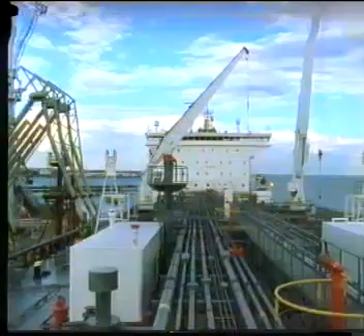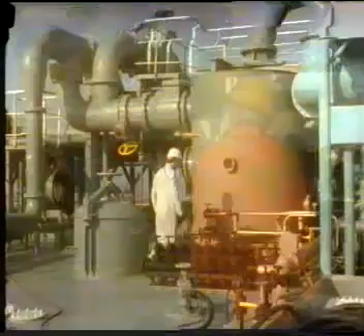All hydrocarbons, whether crude oil or products, are flammable. The reason for the existence of an inert gas system is to prevent fire and explosions. In other words, safety for all those sailing and working on the ship.

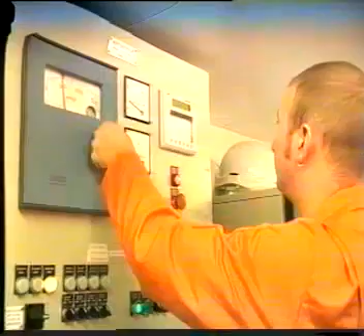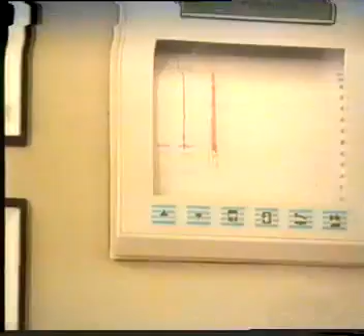To be certain that this safety is sustained, proper procedures are essential all the time. This training package is intended to amplify and emphasize your own training and the material in your ship's inert gas or IG manual. Complete knowledge of this is vital to all deck officers on tankers.

The importance of the IG system is reflected in the way its operation is established in international conventions.

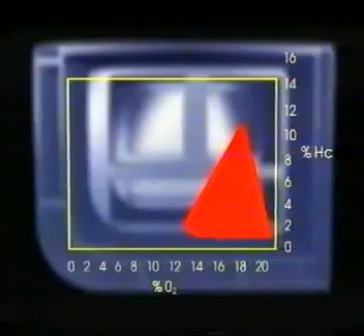The idea behind inerting the tanks is to make fire or explosion impossible because the oxygen level in the tank atmosphere is too low. If we compare the percentage of oxygen in the air with the percentage of hydrocarbon gas, fire is only possible under limited conditions. Outside these, there is either too little oxygen or too much or too little hydrocarbon gas for ignition.

So the percentage of oxygen is crucial to give a good safety margin. The maximum permissible percentage of O2 in inert gas is set in SOLAS at 8% or less for older ships and 5% for new ships. Some terminals require levels of 5%.

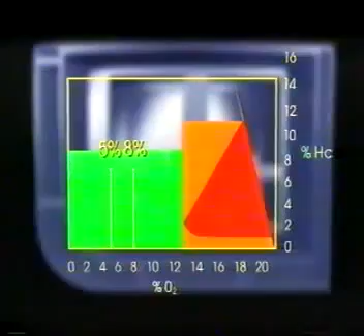The inert gas pressure must always be positive to ensure that air does not penetrate the tanks and increase the oxygen level.

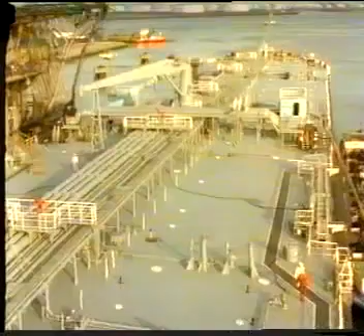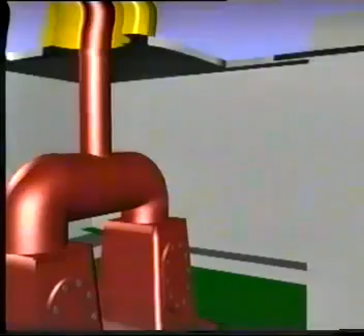The generation of inert gas starts with either the exhaust flue gas or gas from an inert gas generator. This gas has been used for combustion and its oxygen content has been reduced to 5% or below. The gas goes via the uptake valve to the scrubber with its seawater cooling inlet and outlet.

Inside the scrubber, the hot gas is sprayed with water. It is cooled and most of the soot and sulfur dioxide are removed. The gas passes through a demister to remove as much of the water as possible.

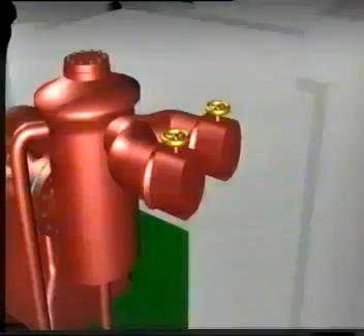There are blower inlet valves before the main IG supply fans. To ensure correct pressure, there is an automatic pressure regulating control valve. Finally, there is either a funnel vent to atmosphere or a recirculation valve and line. These are used to vent or recirculate gas after starting until oxygen content and gas flow is steady.

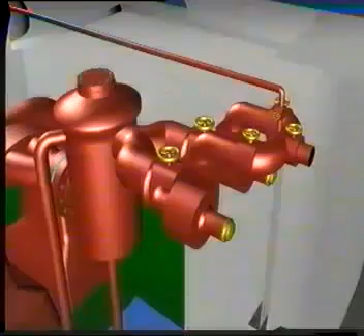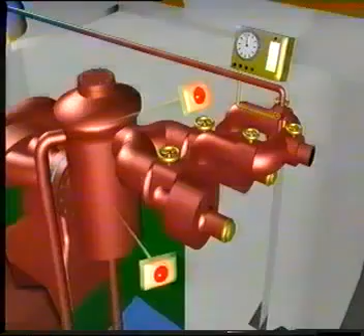Most important are the fixed oxygen analyzer and pressure recorders. A number of alarms will be fitted: to the scrubber to show low water pressure and high water level, to the supply fans to show if they malfunction, after the fans to show if inert gas temperature is too high, and to the oxygen analyzer and recorder to show if the oxygen content rises above the required maximum.

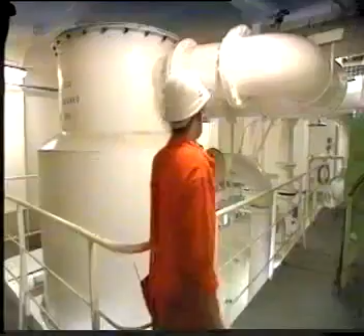Finally, to show if there is power failure to the oxygen analyzer and gas pressure regulator. A well-run system will provide inert gas with oxygen below 5% that is cool and is free of solids and the worst corrosive gases.

Once the gas has been generated and cleaned, it needs a delivery system. And that's what we're going to look at next.

After the pressure control valve comes the deck water seal. This prevents gas from the tanks, which will usually contain hydrocarbon vapors, from entering the engine room spaces. Then there is a mechanical non-return valve and a deck isolating valve before the gas enters the deck main.

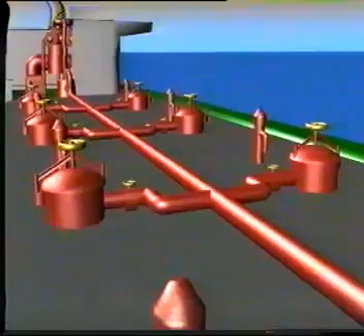There is pipework to deliver the gas to the tanks. On the deck main, there is a pressure vacuum breaker to ensure that excess pressure or vacuum will not damage the tanks. Finally, there are one or two mast risers for venting to the atmosphere.

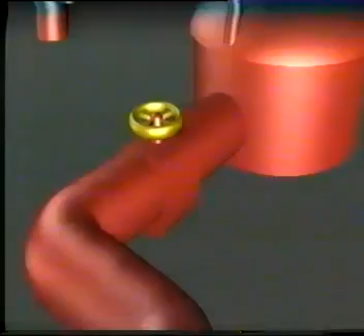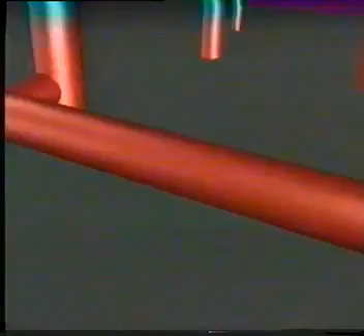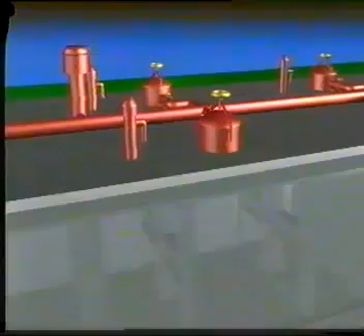Generally, each tank will be fitted with a tank isolating valve. Each isolation valve must be fitted with a locking arrangement. Each tank will have either a full flow individual pressure vacuum relief valve or a breather valve, or an electronic pressure sensor. This is to fulfill SOLAS requirements for full flow vapor relief or pressure sensors to provide secondary protection against over or under pressurization.

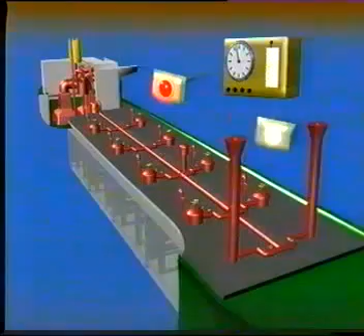Immediately after the non-return valve is a pressure sensor and recorder with a high pressure alarm. A further alarm is fitted which activates if the power supply to the pressure sensor fails. Wet type deck seals will be fitted with a low water alarm.

That then is the entire system. Now we shall examine how it should be started up before examining its use during different cargo operations.

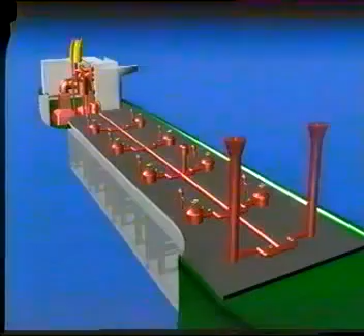They may have to create sufficient load on the boiler to ensure that the boiler will deliver flue gas that will have a low enough oxygen level. If there is an inert gas generator, this will have to be started.

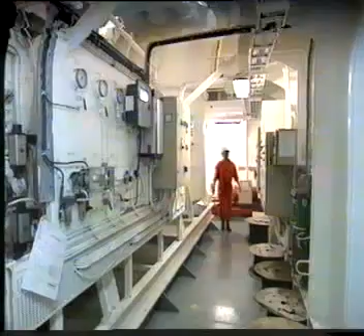Good communication between the deck and engine departments is needed to ensure that soot is not generated during IG operations. The deck department must not rapidly change the boiler load, and the engine department should not soot blow. Both departments need to go through their checklists before the system can be used. The oxygen analyzer must be checked and calibrated.

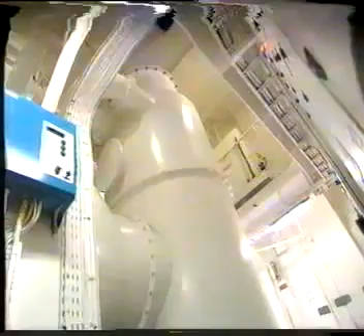The recirculation and vent valves need to be checked to ensure that they are fully functional. The scrubber needs particular attention. Water must be started early to the scrubber to ensure that the internal surfaces are wet. The water flow should be checked before the flue gas can be connected to the system.

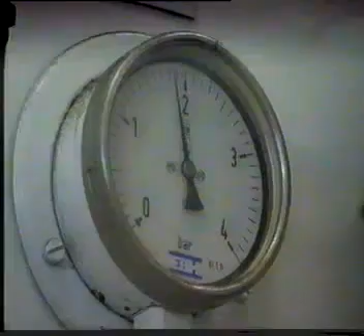When the gas enters the system, it will at first be operated with either the recirculation line or funnel dump line open. While this is happening, a tour of inspection should be made, checking the scrubber for hotspots and ensuring again that inlet and outlet water are flowing correctly and the alarms are operational.

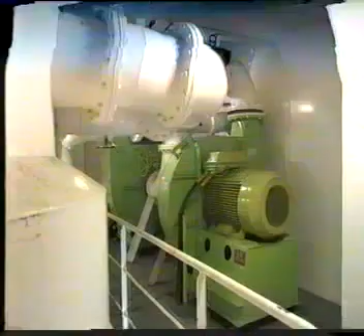The IG fans need sufficient lubrication. They must be checked to see that they are running coolly and smoothly without excess noise or vibration, and that there is no water in the casing. Their alarms and trips also need to be checked.

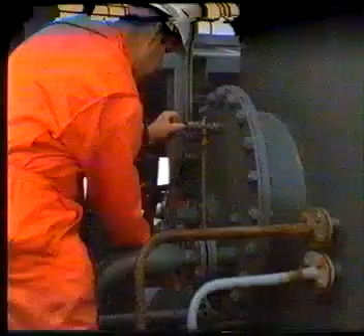The deck seal needs to be checked to ensure that it is fully operational and that the water level is correct. The deck seal pumps are in operation continually, except when all the tanks are gas-free.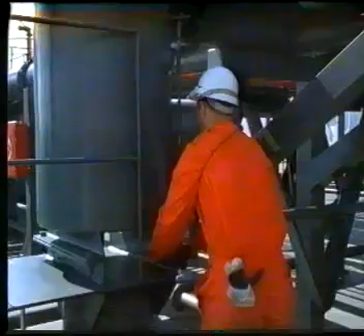The IG main PV breaker must be kept in perfect working order in accordance with the manufacturer's instructions. In cold weather, glycol may have to be added to the water, so the water may need to be checked for level and density. Like the deck seal, it is operational all the time, not just when the system is running.

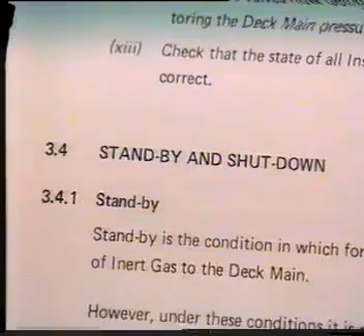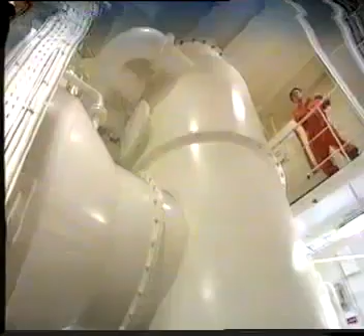Following the correct sequence is important both in starting up and in closing down the system. Follow to the letter the correct procedures in the ship's inert gas manual. Note that at the end of operation, the scrubber water should be run for at least 1 hour to ensure that all the corrosive residues are washed out of it.

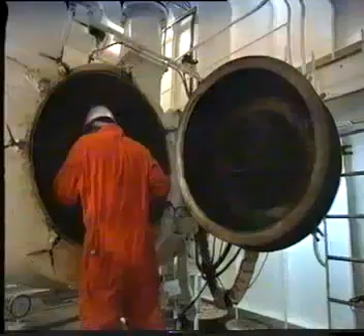Maintenance of this part of the system is extremely important, as the internal environment is very corrosive. Maintenance of the IG system is a crucial part of maintaining the ship's operational capability. This will usually be done on the ballast passage.

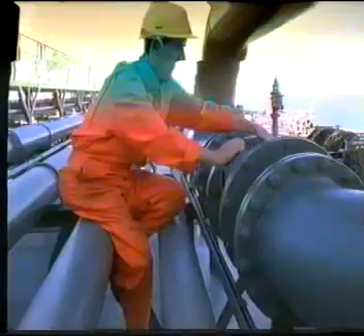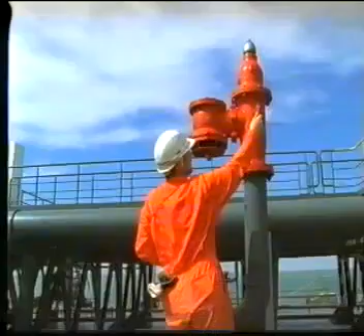The lines should be pressured and checked for leaks. The deck water seal, the non-return valve and all PV valves need to be checked regularly to ensure that corrosion has not affected their operation. The ship's planned maintenance program will tell you how often this needs to be done. Make sure you do it thoroughly.

Now that we've looked at the inert gas system itself, let's examine in detail how it's used during the ship's different cargo operations, starting with loading.

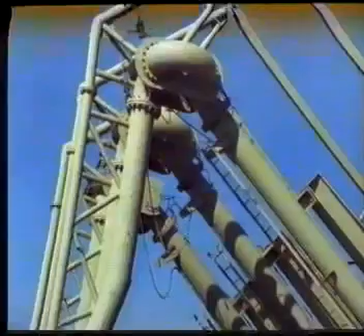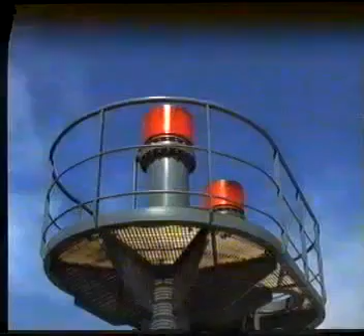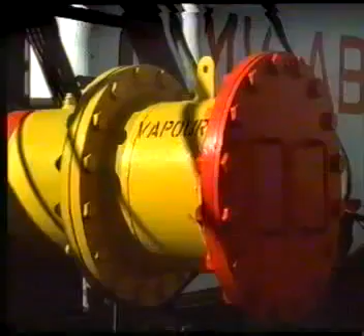During loading, the inert gas system is normally not required. The mast riser valve, if fitted, needs to be in the open position. If the terminal prohibits release of vapor to the atmosphere, all vapors must be returned ashore using a vapor return line. After loading, it is vital to remember to return the mast riser valve and all vent valves to the normal closed position.

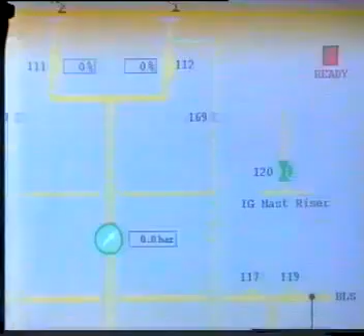During the loaded passage, the pressure must be maintained within the designated pressure range. Early in the loaded passage, vapor release can make it too high. The tank PV valves are designed to deal with this by allowing venting to atmosphere. Movement of the cargo in heavy weather can have the same effect. In some conditions, venting during the day as the temperature rises may mean topping up with inert gas at night when the temperature falls. The IG pressure must be monitored throughout the voyage to ensure it does not become too low.

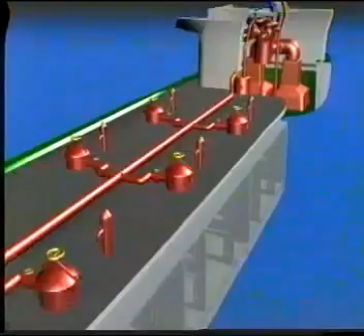It is during the discharge that the inert gas system is most important. Its correct operation is vital to the entire procedure. Before the discharge begins, the system must be run up and checked.

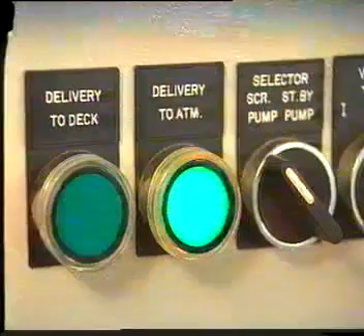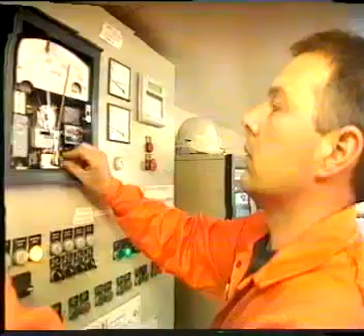At first, the system is operated either with venting or on recirculation. It must not be run for long on recirculation, as the temperature and oxygen content of the gas may increase. Before gas is delivered to the tanks, the system must be allowed to stabilize and the pressure set in the cargo control room.

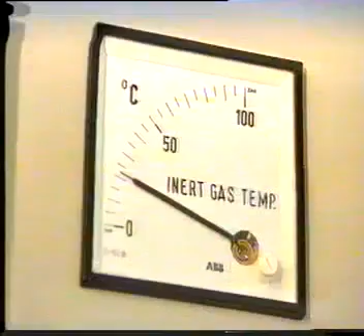Air control, that's 1, 2 and 3 manifold fully open now. I have a cargo handling plan for you. Yes, the captain gave me...

There will always be a lull while the safety checklist and cargo matters are sorted out. Once these have been agreed, and there is positive IG pressure, the discharge can begin. That's 1348, commence discharge.

Cargo deck watch, if you can have a check round on deck please, and check the offshore manifold. As the ullage is small at the start, the correct pressure will be reached quickly. Then there will be a period of adjustment as the inert gas supply adjusts to the rate of discharge and the increasing tank space above the cargo.

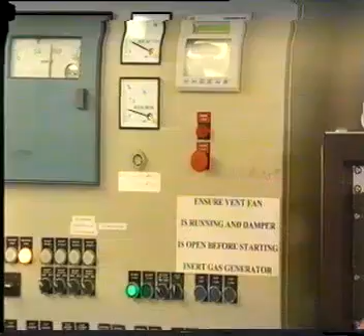The deck crew needs to monitor the IG system throughout the discharge. If the system fails, cargo discharge will have to be stopped. If the IG pressure falls, then cargo pumps will need to be slowed.

If the oxygen level becomes too high, alarms will sound, and the system may vent to the funnel or shut down automatically. Cargo operations will not be able to start again until the inert gas is operating properly.

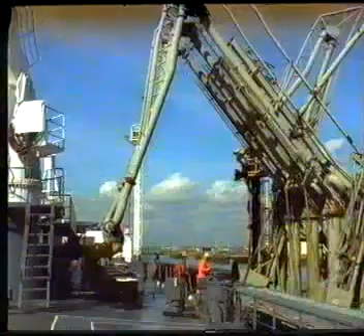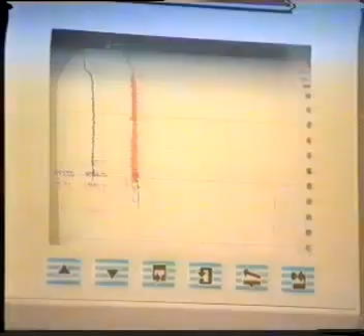Once the discharge is complete, inert gas is delivered to the tanks until the designated pressure is reached. The oxygen content of the tank atmosphere must be 8% or below, and the pressure at least 100 millimeters water gauge. Once these conditions are achieved, the plant can be shut down.

Hello engine room, duty officer here. That's just finished with the IG. If you could switch it over to diesel and shut it down. Okay.

The inert gas system is generally not required during the ballast passage, unless there is a need for further purging prior to gas freeing to permit tank entry.

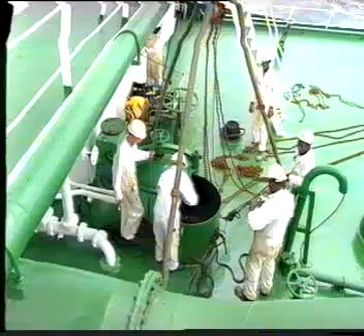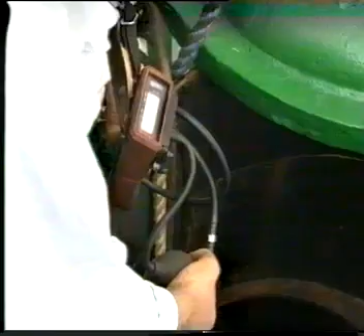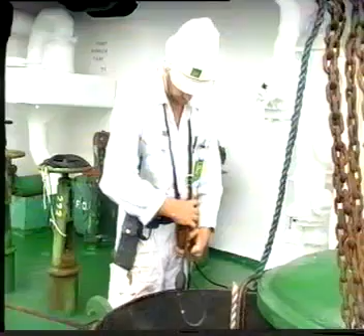The first step in tank entry is purging the tank until the hydrocarbon level is below 2% by volume. Once this value has stabilized, then gas freeing can begin. It must continue until the oxygen content is 21%, and a combustible gas meter shows a reading of less than 1% of the lower flammable limit.

Hydrogen sulfide may also need to be checked. Check the Materials Safety Data Sheet, the MSDS, to see if you need to check for benzene or mercaptans.

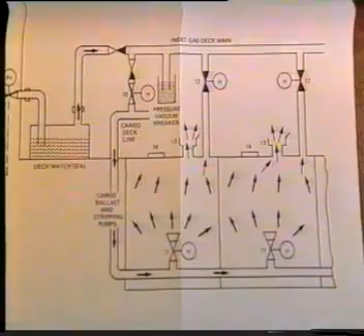This gas freeing can either be by the dilution or displacement method. Your ship's manuals will tell you which your system is designed for.

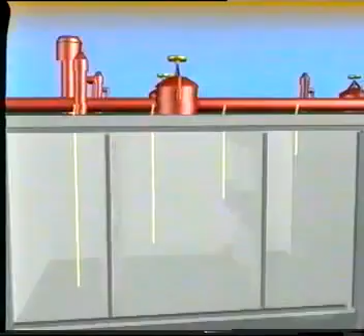In gas freeing by the dilution or mixing method, air is forced in through specially designed nozzles. Analysis of the oxygen content must be made at several different levels to follow the progress of the procedure. The air must enter at high velocity to ensure thorough mixing. The probes show the gradual replacement of the gas.

In the displacement method, low velocity air is required. Again, several readings are needed. Here, there is a boundary between the inert gas and the air. The probes will show a sudden change rather than a gradual one.

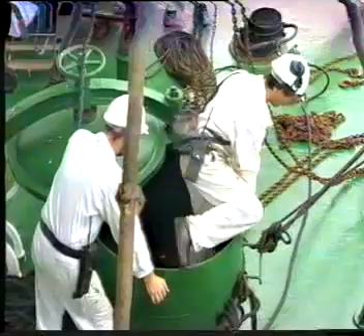Any tank entry must be approved by the master and supervised and strictly controlled by a senior officer, with correct procedures observed. These procedures will be found in the ship's manuals and in the International Safety Guide for Oil Tankers and Terminals, Appendix I.

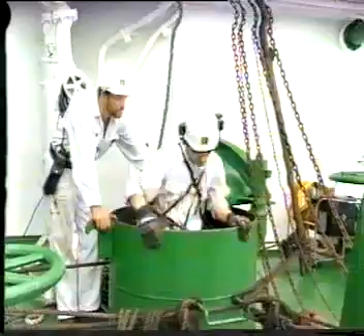Once all personnel have left the tank and all equipment has been removed, the tank will need to be re-inerted. Re-inerting will be by the same method as gas freeing, either the dilution or displacement method, whichever is used on your ship.

Oxygen readings should be made regularly, at least at the top and the bottom of the tank, until the oxygen content is below 8%.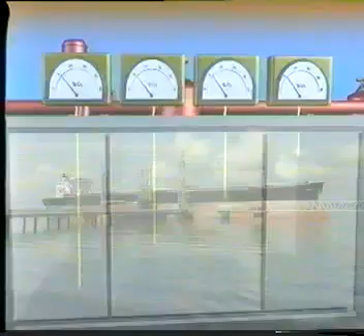There are no hidden secrets in successfully operating an inert gas system. It takes attention to detail, keeping to the proper procedures, and keeping up with maintenance.

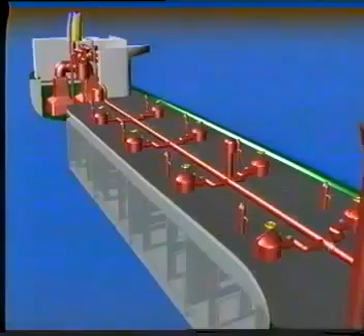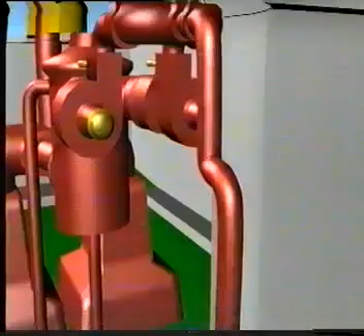The inert gas system is a fundamental safety system of every petroleum tanker. Inert gas is protecting the ship throughout each and every operation, both at sea and in port. The correct operation of all components of the system is especially important during discharge, when it is vital to the commercial success of the ship, as well as to the safety of everyone on board.

During operation, the deck department must continually monitor the inert gas oxygen content and pressure. During ballast voyages, make sure that the system is given the proper attention and that the maintenance schedule is kept.

Pumps are now settled at 1200 revs there, Gary, if you want to come up while we do the line displacement.

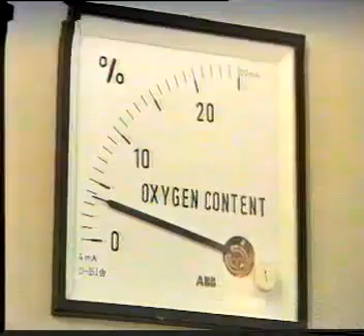Be certain that you understand and keep to the procedures set out in your manuals. Make sure that you keep the system correctly maintained. The inert gas system is one of the most important safety installations on any tanker. Take good care of it, and it'll take good care of you.